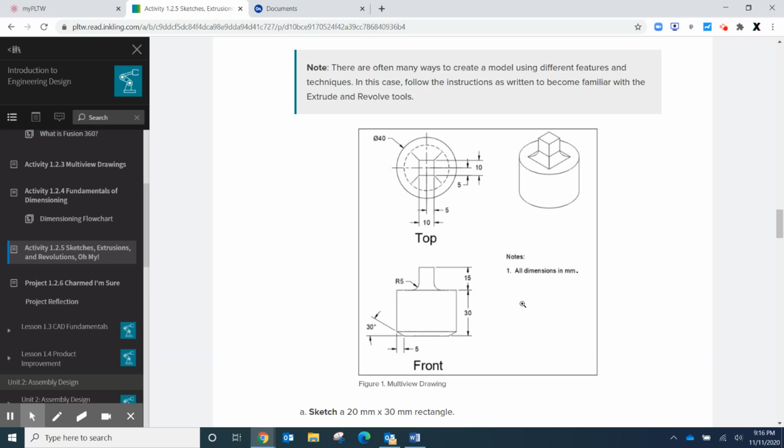Later on, you'll be working through other things and creating more things, but I first wanted to show this first part to you. Okay, so we're going to jump into Onshape here, and I'm going to create a new document actually for this. We're going to call it 1.2.5

revolutions. It's important that you name your files appropriately to help you retrieve them later, because oftentimes they will refer back to them as they do in this activity. So a good naming structure and then naming multiple parts will help you be able to reuse them. So we're gonna hit OK, jump in here. And I'm just gonna go back and look at this again here.

So we have this larger cylindrical piece and then a square piece jutting up in the middle of it. So let's start with this first piece here. So it's 30 millimeters. Now notice that all the dimensions are in millimeters, so we want to make sure that we change our units to millimeters. So don't miss that, okay? This drawing will be done in millimeters. All right, so we're 30 millimeters overall and a diameter of 40 millimeters.

All right, so we're going to create this. We can do this in two different ways. We could do it the way that we have been doing it, creating a 40 millimeter circle and then extrude it. But I want to actually show you how. I'll show you both real quick. But first, let's make sure we get the units right.

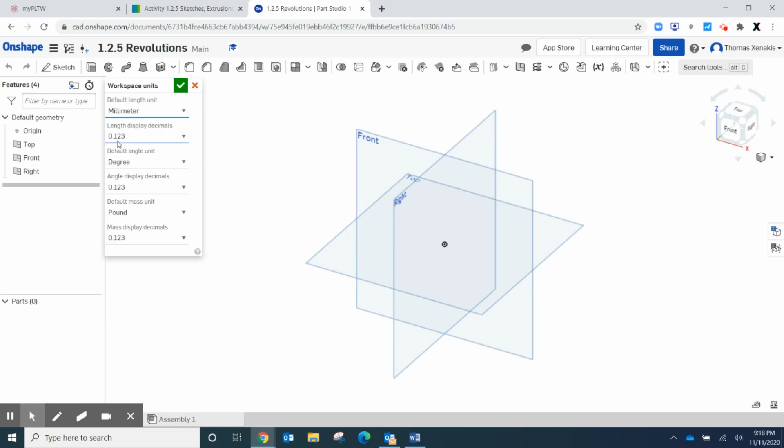So go up to here to the document menu, workspace units. Click workspace units, and instead of the default being inches, we are going to go to millimeters. This again shows you how many decimal units, degrees for angles, mass. Let's go to kilograms. You can make this grams, it doesn't really matter, but since we're going with millimeters, we're kind of making this metric. I figured let's go ahead and go with kilograms, okay? Green check and we're all good.

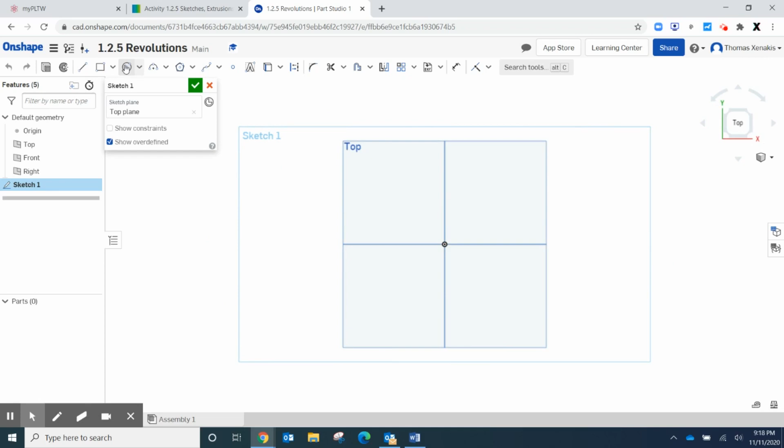All right, so let's first do it with an extrusion, okay? So I want the thing to be vertical, so I'm going to right click on the top view and create a new sketch. Again, N for normal, and then I'm going to create a 40 millimeter diameter circle. And green check that. And all right, here we are with the top view. It'll give me back to my front view. Where am I? There I am.

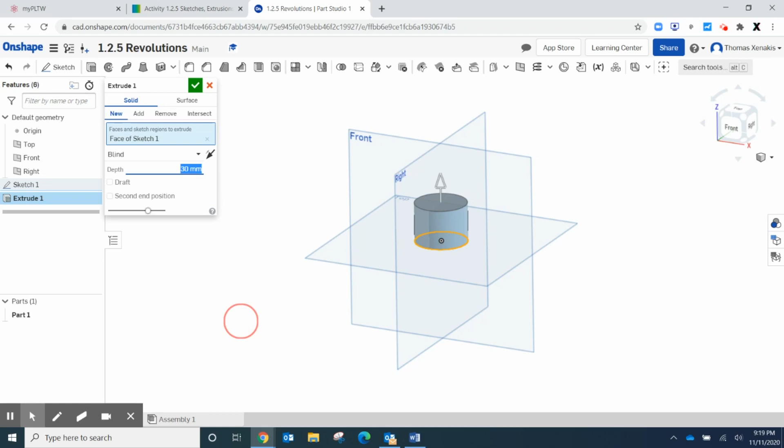Okay, I'm going to extrude it now. Select this, and I'm going to go for a blind depth of 30 millimeters vertically. And I'm going to green check that. All right, so that was how we have done it up to this point. I want to now show you a different way to make that part. Okay, so that's how we could do that the way that we have been doing that.

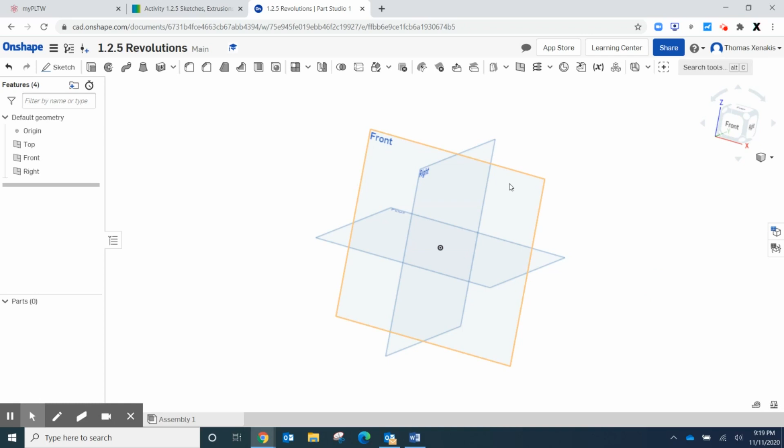I'm going to delete this extrusion and then delete this sketch. So isometric, kind of get me back to my starting point. This time, I'm going to actually create a revolution about the right view. So I'm going to first create a sketch on the front view. So I'm going to right click, new sketch, get me back to normal here with the N.

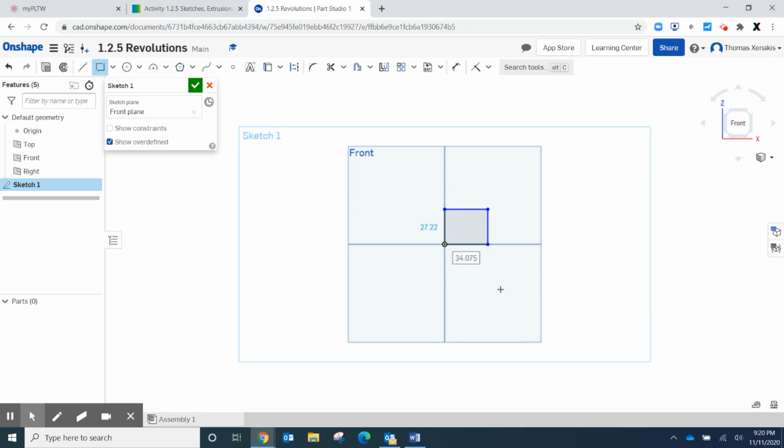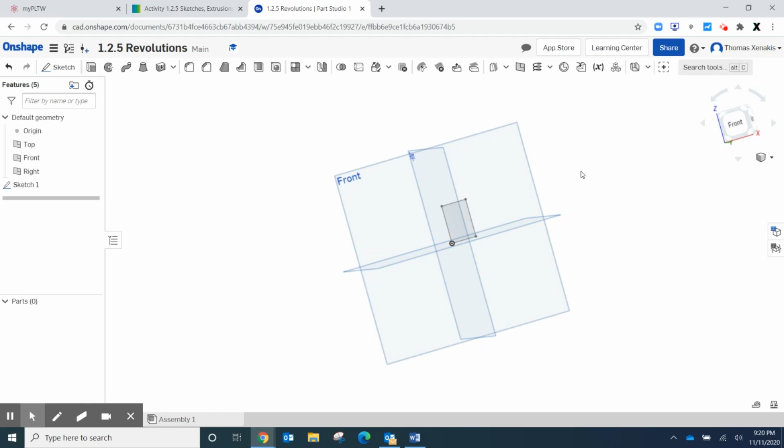And this time I'm going to draw a rectangle, except this time it's going to be 20 millimeters wide and 30 millimeters high. I'm going to green check that. And now I'm going to want to create a revolution about the left edge here, or this vertical axis, which is the right plane.

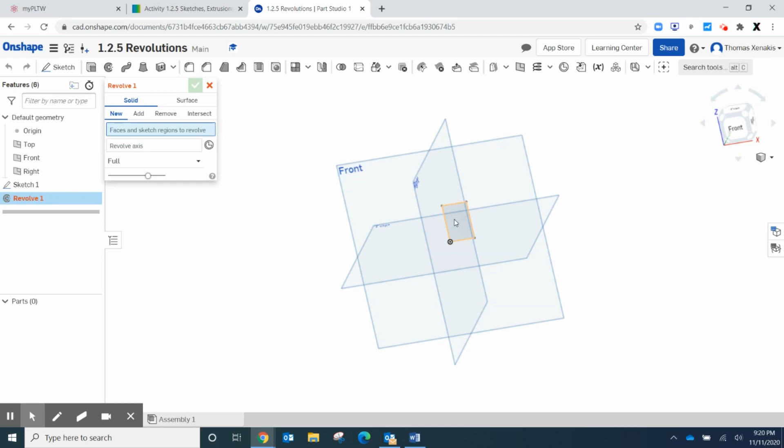Okay, so let's see. Here's our extrude, here's the revolve command. We'll eventually use all these, but let's click on this revolve command and see what we got. Okay, so again, just like before, it's asking you for the faces or the sketch regions that you want to actually revolve. So let's pick our rectangle here. And now it's asking us for the revolve axis. Select the axis to revolve around.

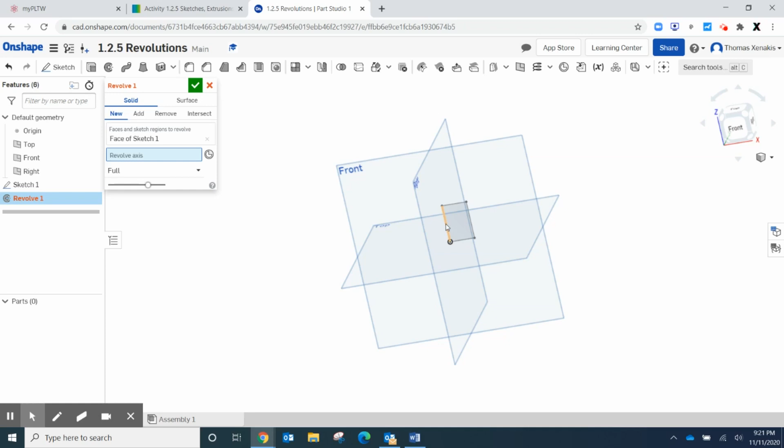Okay, so if we click on there, I want to actually click the left edge of this rectangle. If there was some other line or other reference, it doesn't have to physically be on this. We can revolve around anything. It's just telling you that it needs to know what axis I want to rotate this face, basically what we created here as a rectangle, around. So I want to make it a solid cylinder, so I'm going to rotate it around the left edge here.

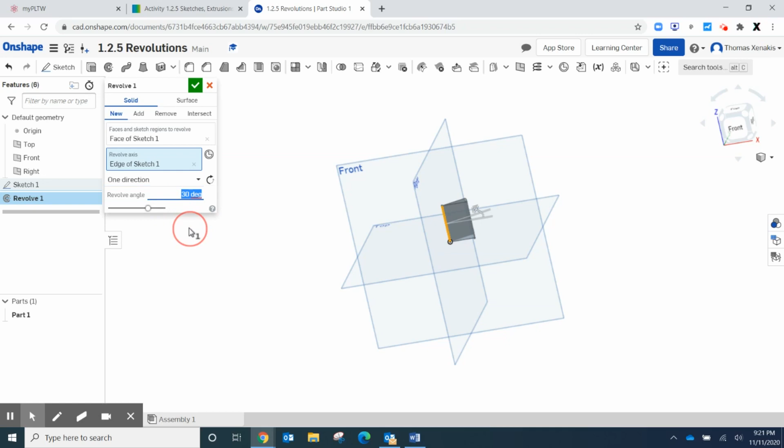Now, by default, it's rotating it as full. Okay, so you can do it in one direction and change the amount of angle that you want to, right? Like if we wanted to do a semicircle or a half, we could do 180 degrees, right?

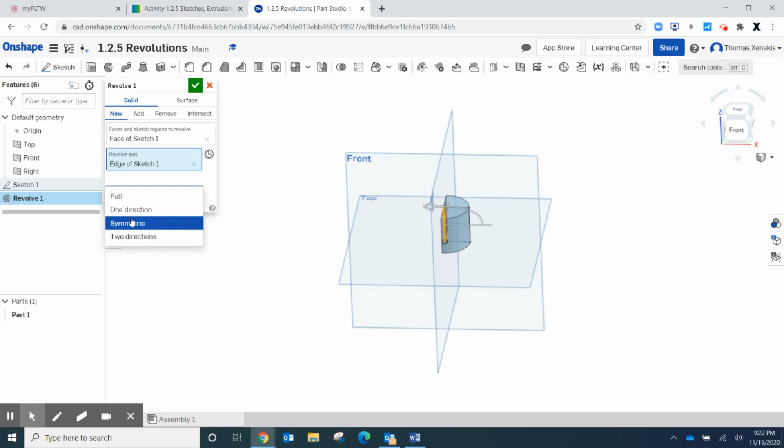And that would give me a semicircle, okay? But in essence, the full is a 360 degree, rotate all the way back around to the original plane. Some of these other ones are symmetric, right? So you could rotate in two different directions from the plane that you created the sketch, which would be equally symmetrical versus two different directions. You can do it different degrees in each direction is really what this is for. But for what we're doing here, all we need is a full 360 degrees. So we're going to go ahead and click full.

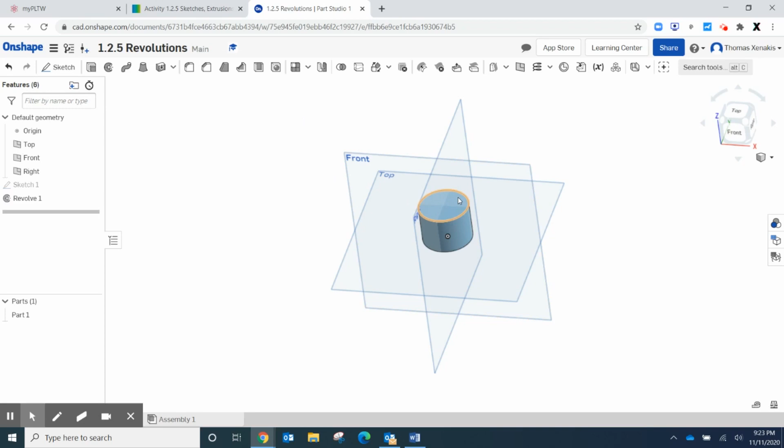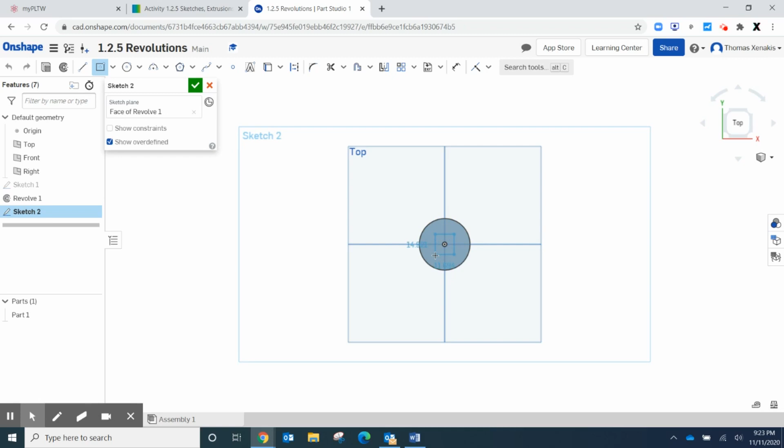So we're going to go here. Again, I'm going to right click on the actual face of the sketch, make a new sketch, go normal. And this time I'm going to use a center point rectangle, okay? Because I want it to be right in the center. There it is. All right. And that was 10 millimeters by 10 millimeters. And green check on my sketch.

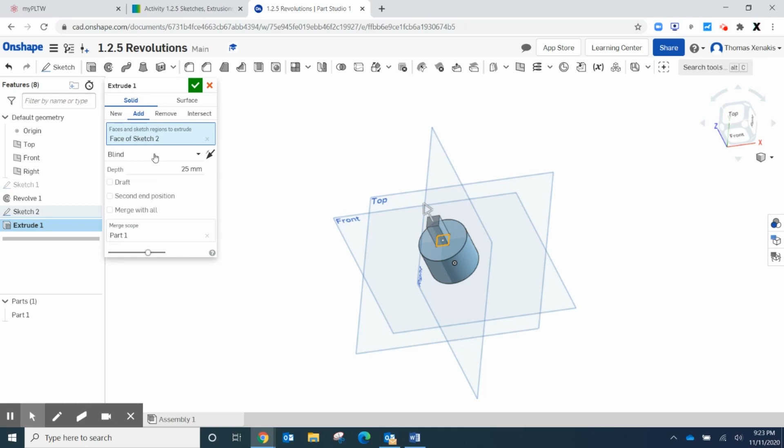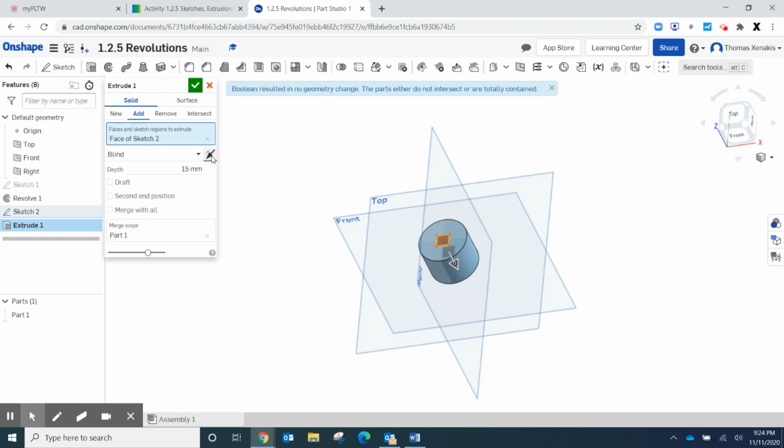Go to extrude. I select this face here. There you go. And I want to flip it. Boolean resulted in no geometry change. Okay. We are going to go to a depth of 15 millimeters. It's not liking this. So we want to add. Right, let's add and change our direction here. There we go.

All right, so we want to add it to the part. We don't want it to be a separate piece. We want it to actually physically add and attach it to there. So we're up 15 millimeters. We're good to go. We're going to hit the green check. And now our part is starting to take shape.

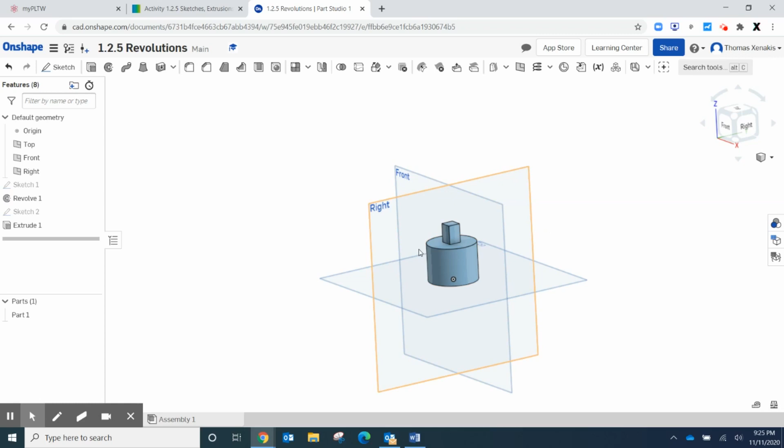So we're going to go to our fillet command. Again, no reason to need to do anything here in a sketch. We're just going to actually do this in 3D. Again, here's the fillet command. 5 millimeters is already defaulted to that. So I want to actually select each of these.

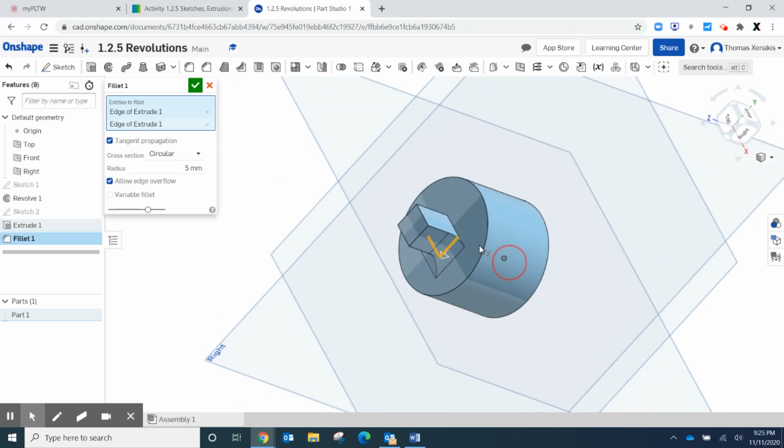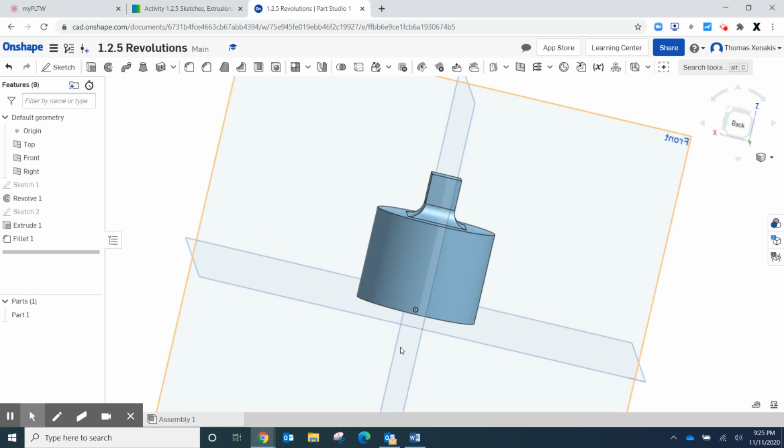It's actually filleting it in as I go. And I hit all 4 sides, and now they're all curved. So we're going to be done with that. So there is our fillet on the inside corner of that little knob that's sticking out. Now the last piece is a chamfer that we want to do to this bottom edge here. All right, so let me get you back to isometric. Okay, and go back here.

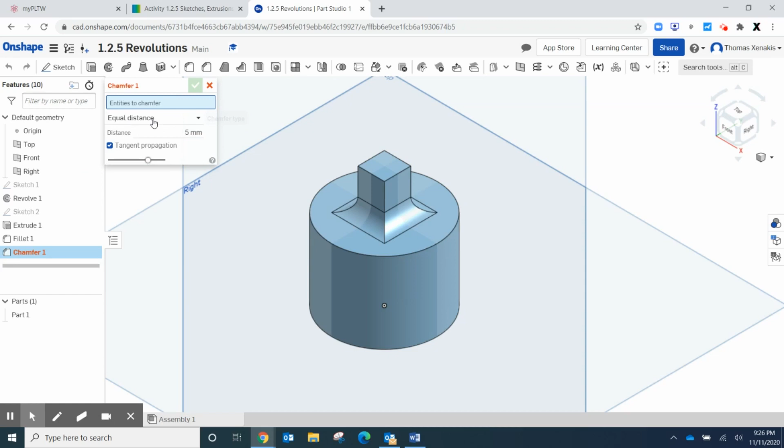So it's going to come in 5 millimeters at an angle of 30 degrees. Now a chamfer, so 30 degrees and 5 millimeters. So a chamfer over here is a straight cut off of the corner. There's a couple different ways to define that. So let's click on here. All right, so entities to chamfer, it wants to know what it is I want to chamfer. And what we are going to chamfer is this entire edge all the way around the bottom. Now you can see it cut off quite a bit there. And let's look and see how we can define this.

Okay, so equal distance means basically it's going to cut off on a 45-degree angle for whatever the distance is, and equally split it between the vertical plane and the horizontal plane of that corner. But we can do two distances, where you can define each distance up the side of the plane and into the middle of the horizontal plane. But what we want to actually do is not two separate distances. We want to define a distance and an angle. Okay, so the angle was 30 degrees and the distance was 5 millimeters.

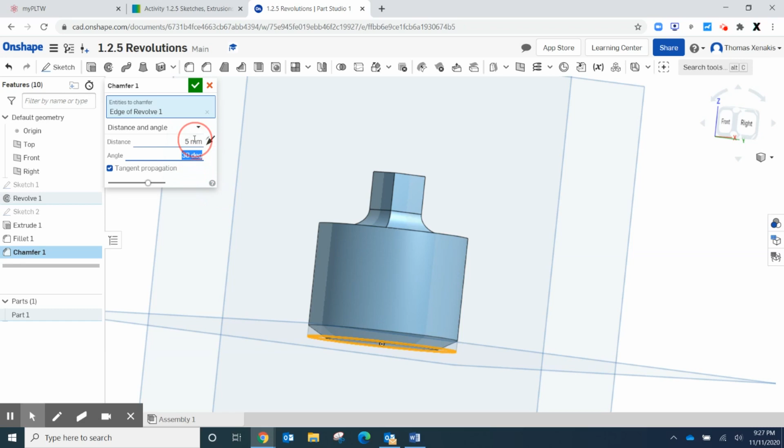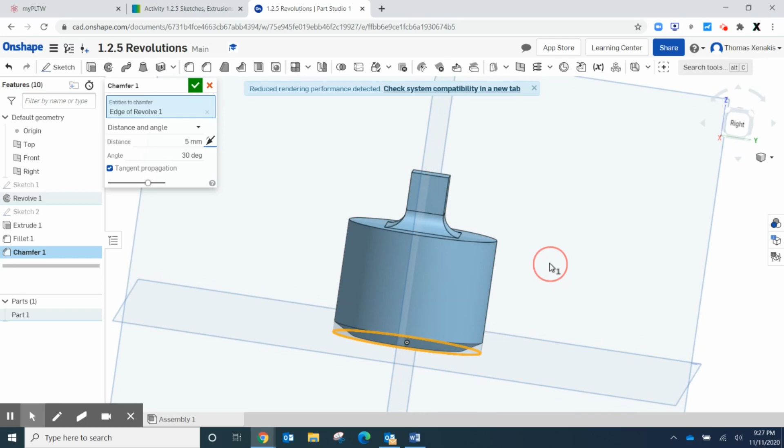Okay, so 5 millimeters. And let's see, if we toggle this, it changes the orientation of which edge is tracking the 5 millimeters on. Okay, and we want it actually on that one. Okay, so it's 5 millimeters in and 30 degrees. So let's look at that from the front view. And there you can see that profile, and let's just go back and check. And that's exactly what we want, 5 millimeters in and on a 30-degree angle.

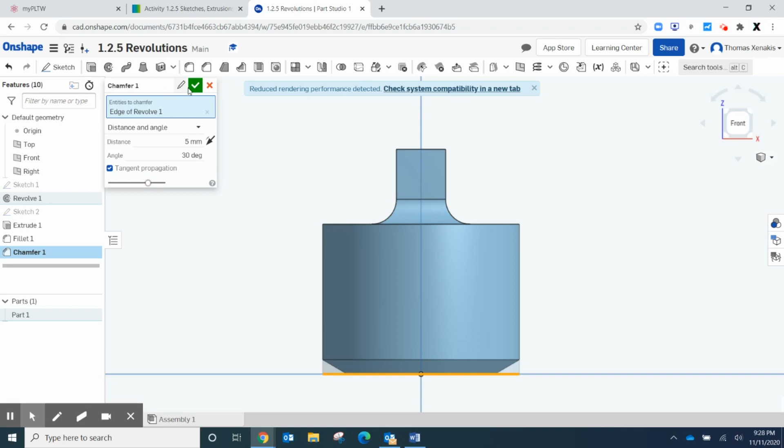And there you have our part. Let me go ahead and green check this to close it. Go back to, well, I'm in the plane there, isometric view so you can see it. And there you go. There is our part that we created, again, using that revolve command, the fillet on the inside edge and the chamfer at the bottom edge.